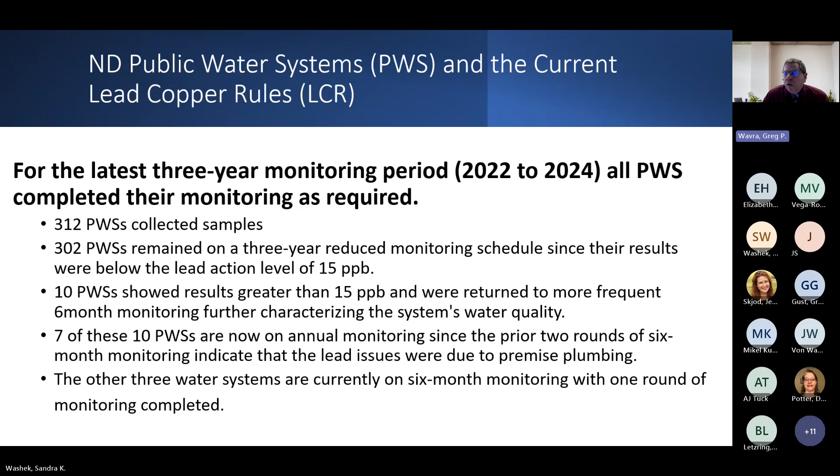So what are the new lead and copper rule objectives? The first one is to reduce the risk of exposure to lead through drinking water. There are 3 ways of doing this.

First is to locate lead service lines through a materials survey. This is a requirement of the water systems themselves. All but 2 water systems completed this and turned it in to us as of October. The thought behind this is to come up with the types of materials going into homes, so we know if it's lead, galvanized, or what type of pipe is coming into a home.

Another part of it is replacing all lead service lines that we find in these materials surveys within 10 years after the survey is completed. That's done through some federal funding and grants that are out there to get these lead lines out of the distribution system and make that water safer to consume.

And the other part is these rules will lower the lead action level from 15 parts per billion down to 10. So sampling, the quarterly, 6-month, and yearly monitoring will be triggered at that 10 parts per billion instead of the current 15 parts.

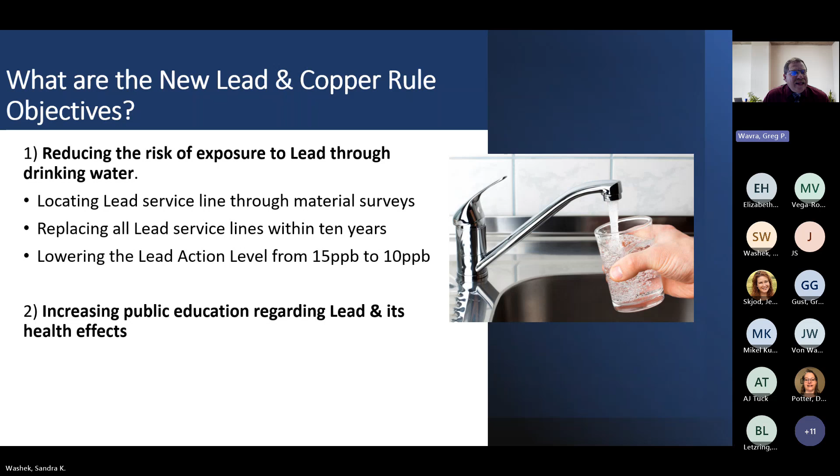So the CCR is, as I stated earlier, an annual water quality report written by the system to inform customers of the current status of their water system. The Lead and Copper Rule revision requires that specific information regarding lead be included in the 2024 and all future CCRs being sent out to consumers.

Information required will include the health effects of lead, and a lead educational statement indicating ways customers may reduce lead exposure from drinking water, such as flushing taps with cold water for cooking and drinking, and other ways of reducing lead like filters.

Also, there will be a range of sample results from the most current round of sampling. In the past it just had a percentage of the monitoring, but now you will see a range from the highest to the lowest samples throughout the distribution system as they sample every year.

And then the lead inventory information, such as why this is being done, where the report is located so consumers may view it, future actions that may be required to update the inventory, and any information regarding potential funding for systems and homeowners for replacement of lead lines.

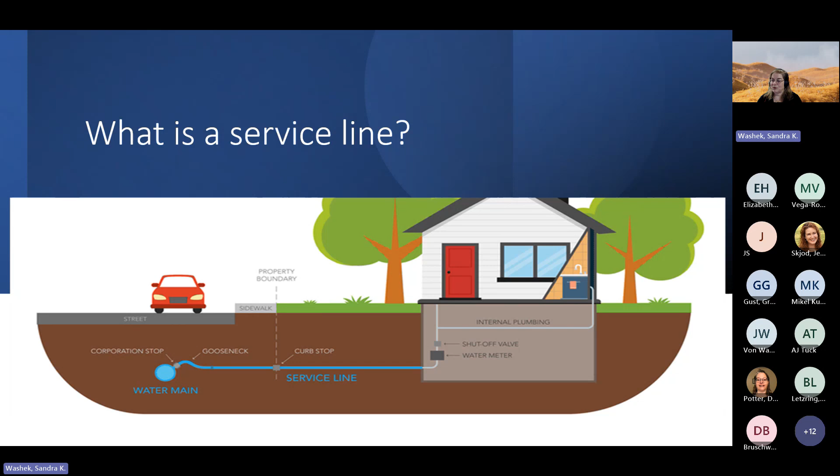From that curb stop to your house is usually owned by the private individual. But again, every public water system has its own ownership rules on service lines. Sometimes the homeowner owns the whole line, sometimes the public water system owns the whole line, sometimes it's split. Talk to your public water system about it.

The other thing I'll define is a term used in premise plumbing. Premise plumbing is where you own the plumbing inside your house. It's not the ownership of the public water system where the service line comes in - it is your plumbing inside your house.

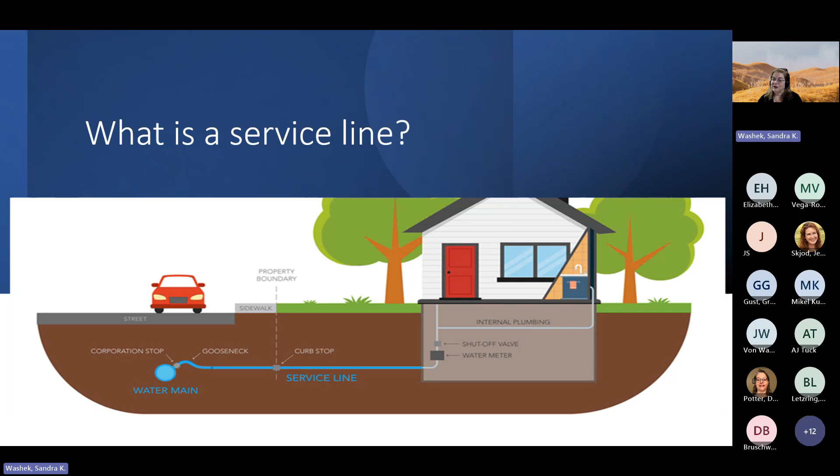So just remember that. One other thing about service lines and why we're identifying this - we're looking for these lead lines coming in. Most lead service lines will not be greater than 2-inch diameter coming into the home. So your water main will not be a lead line - it might be cast iron, but it's not lead. That's due to the size and weight constraints when these lead lines were laid. So just remember, a service line connects the water main to your building.

So under the lead and copper rule, there were some mandates sent out under this regulation. One of the mandates is that all public water systems nationwide were required to conduct an initial lead service line inventory of all service lines within their system and send that information to DEQ by October 16th, 2024.

Part of this mandate required systems to identify and classify service lines as either: lead; galvanized requiring replacement, what we call GRR; where a galvanized line was either hooked up to a lead line or previously hooked up to a lead line; non-lead, like copper or polyplastic; or unknown. Usually that definition of unknown means they don't have documentation identifying what that line is.

These service lines have to be identified by material type, no matter the ownership of the service line, whether it's split or owned all the way through. All service lines had to be on the inventory, whether currently in use, turned on by a water system, or going to an empty lot, or part of a pasture tap, since some rural water systems run service lines out to a pasture tap or irrigation, or if it's a fire line - in some big commercial systems they have separate water lines set in for fire lines. They all have to be on this inventory.

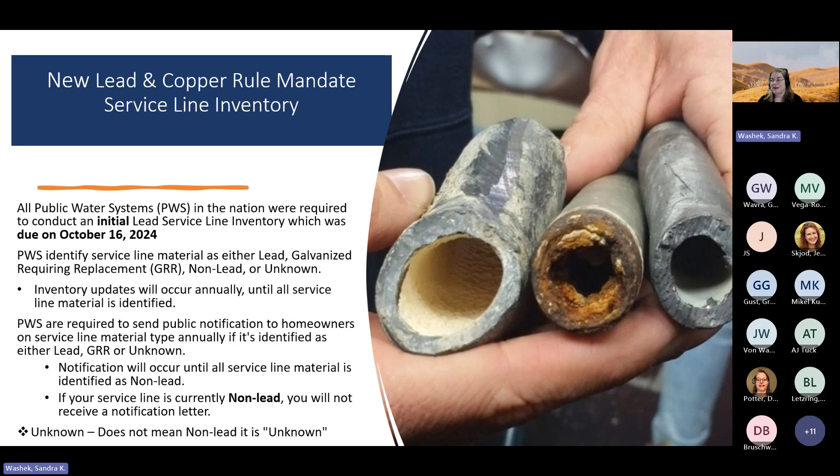If it was identified as non-lead, you did not receive a letter because that letter was not needed to be sent. These letters will continue to be sent out annually to property owners until all materials are identified as non-lead. One thing I want to stress is if you received an unknown letter, it does not mean it's non-lead. We just don't have written documentation or visual inspection telling us what that material of that service line is made up of.

So going back to our 2024 results, our service line numbers in the state of North Dakota, what came in. We had some systems that were combined, so we had only 310 systems needed to do lead service line inventories. 308 sent them in.

As of December 31st, 2024, we had 274,818 service lines inventoried. Of that, we know 5,112 of them were lead, 429 were galvanized, 146,001 non-lead, but our big number is running a norm with the nation. We had 123,276 identified as unknown. We either had both sides or one or the other side of that service line ownership not being able to identify as some type of material.

So what's going on in the future, our next steps by the public water systems is start downsizing these numbers of unknown service lines on their public water system inventory statewide. That is our big push these next couple of years.

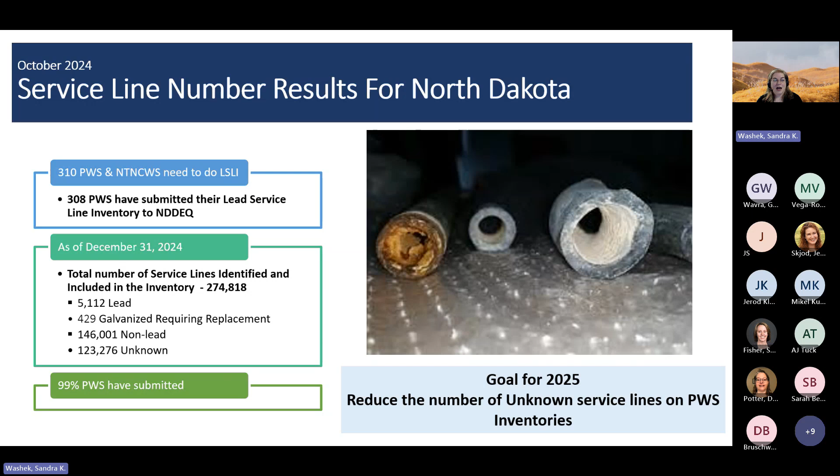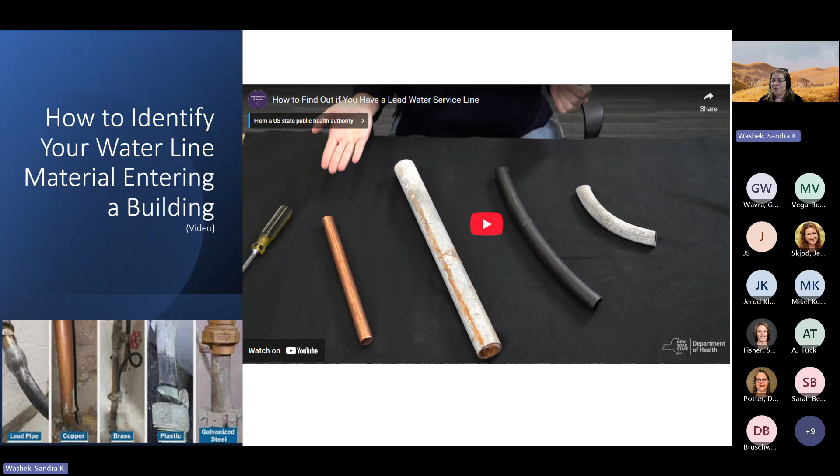And how are we going to do that? So the first thing most homeowners need to know is how do you identify your service line material? What do you do, and how could you go down and look at your service line and know what you're looking at? Well, the state of New York was really nice to present us with a little mini video that we'll play here, and it shows how homeowners can identify their service line material type. So I will start that here.

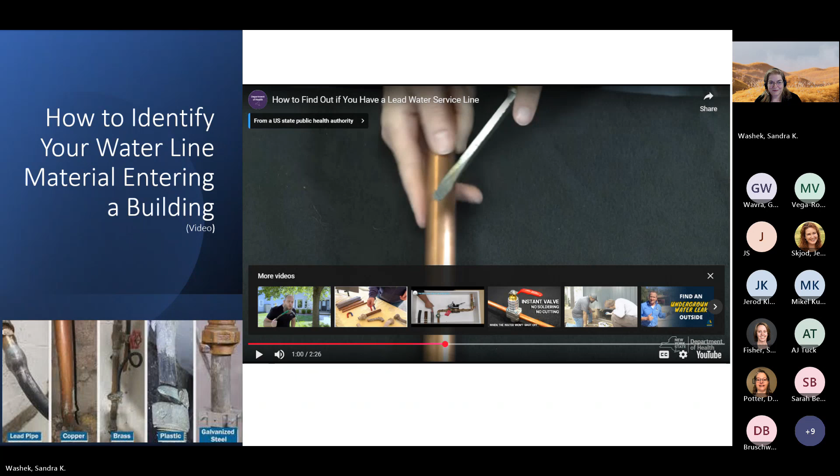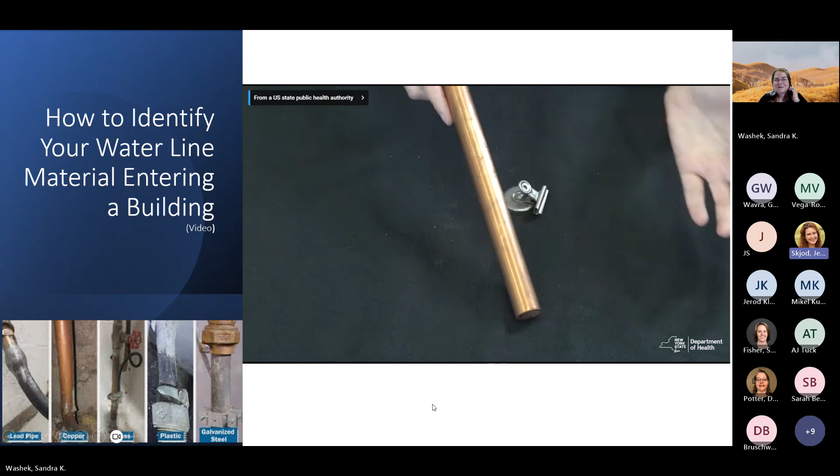Do you know if there's sound on this video, Annie or Sandy, or is it? Pardon me. I guess we're having a sound problem here and everything.

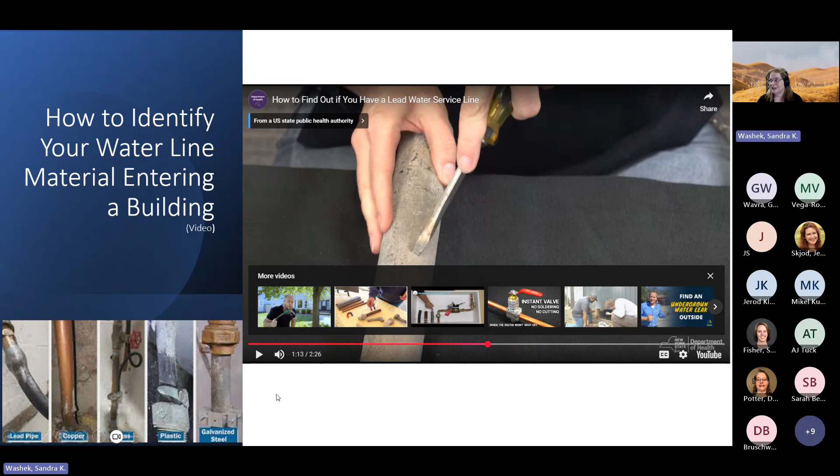I'll just put a link to the video in the chat. We'll put the link to the video in the chat. Pretty much what it does is shows you the step-by-step process of going through and looking at how to do it. We also have a slide on our website going forward with the exact same information to help you identify it.

Taking a screwdriver, a flat edge, or a key, if you don't have that, you go down and find your water meter. You look at the pipe where it comes out of the floor or the wall, and you look at the metal and scratch it very lightly. Don't gouge it, just scratch it lightly. And if the scratch comes out looking like copper, like a brand new penny, and you have a magnet and the magnet does not stick to copper because magnets won't adhere to copper, you've got a copper line.

If you've got a silvery gray line and you scratch it and it's really shiny, but your magnet will not stick, you've got a lead line. Magnets do not stick to lead. If you have a silver line and you scratch it and it has a dull silver look, but the magnet will stick, you have a galvanized line. Magnets will stick to galvanized, but will not stick to a lead line.

Then, looking at that information, we always tell people if you have a nice cell phone, take a picture of it, because then you can record what kind of material you have on your system. Again, this is a way homeowners can do self-testing. A lot of public water systems this last year sent out information asking people to survey and do this, send a picture, do the scratch test, and send it in on their surveys to the public water systems. They also had their own handouts you could follow for how to send it in. Again, this first round of survey happened before October 16th, 2024, and is just part of this initial round of inventory.

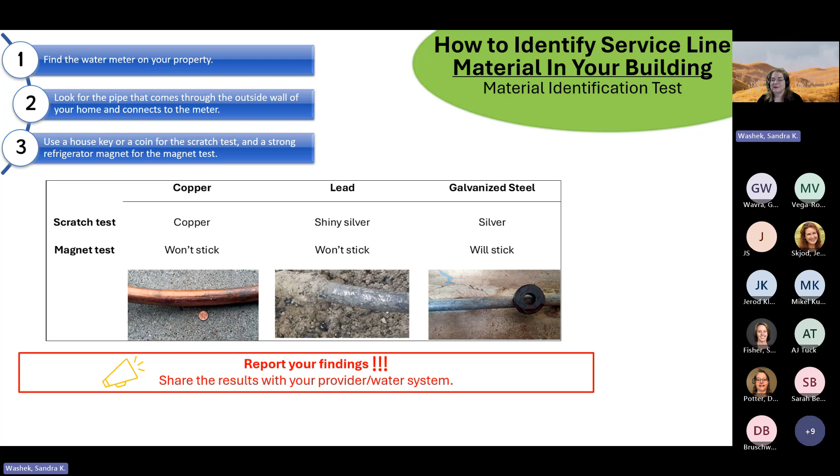With that, the public water systems sent out notification letters to homeowners defining and characterizing their service line. This material type was again lead, GRR, or unknown.

If it was all non-lead, you did not receive a letter. Part of this notification also provided information the public water systems wanted you to know as a homeowner, including steps to take if it was a lead or GRR line, such as flushing your water system after being away, cleaning your aerators, replacement and funding opportunities the system was going to offer, how to report or update your service line material, and how to contact your public water system with questions on the inventory or notification.

Again, the question was asked, why did I not receive a letter on my service line material? It was classified as non-lead, so they did not send a letter. The other question was, how long will I receive this notification? You will receive it annually until both sides of the service line are identified as non-lead, or a line identified as lead or GRR has been replaced with a non-lead line.

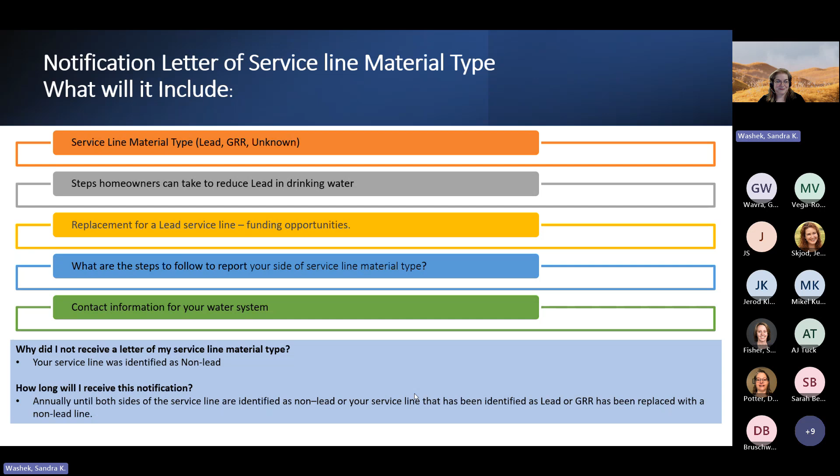The other big question we received was about what's going on when I received an unknown letter. What does unknown mean? It means that either the public or private side did not have written documentation that the city could find, or they could not do a visual inspection of the service line, either on the city-owned side or the private, homeowner's side. That is why it was defined as unknown.

So let's do a quick scenario on this. If there's a yes on the chart, they knew what the material type was, identified by a written document or visual inspection. If the chart says no, that means unknown, they don't have anything. So if the public side knew it was, say, copper, but the private side was unknown, the property owner received the letter.

Swap the other two: the public side didn't have documentation on what was there, but the private side, the homeowner, sent the survey in telling them what they had. Why did I receive an unknown letter then? Because the public side still didn't have that identification. If both sides were identified as non-lead, you did not receive a letter. If both sides were identified as unknown, property owners received the letter. Again, this was required under the Lead and Copper Rule, to receive notification of how that service line was classified.

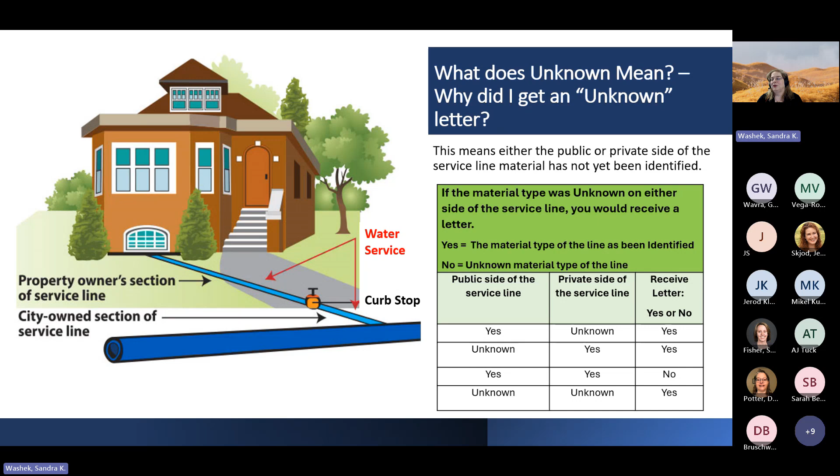Moving forward, what are we looking at in the future so we don't have to send all these unknowns and can identify these service lines? Over the next couple of years, public water systems, rural water systems, and other systems, along with some contractors the public water systems are working with, are going to start sending out additional surveys. They're going to do media campaigns, announcing their plans through social media and Facebook, sending letters, sending people out door to door, asking homeowners to fill out surveys or let them in to take a look.

At that time, it's the homeowner's choice to decide how they're going to help the public water system identify that private or unknown side of the service line. The homeowner can choose to fill out the survey that was mailed to them and take a picture and send it in. That way they know what's going on, send it in, and they don't have to have somebody knocking on their door and letting somebody into their house.

If the public water system sends somebody out and they're knocking on the door, it's up to you as a homeowner to decide if you're going to let them in or not. If you're concerned, call the public water system and ask if this person is supposed to be here, who they're working with, and whether they're legit.

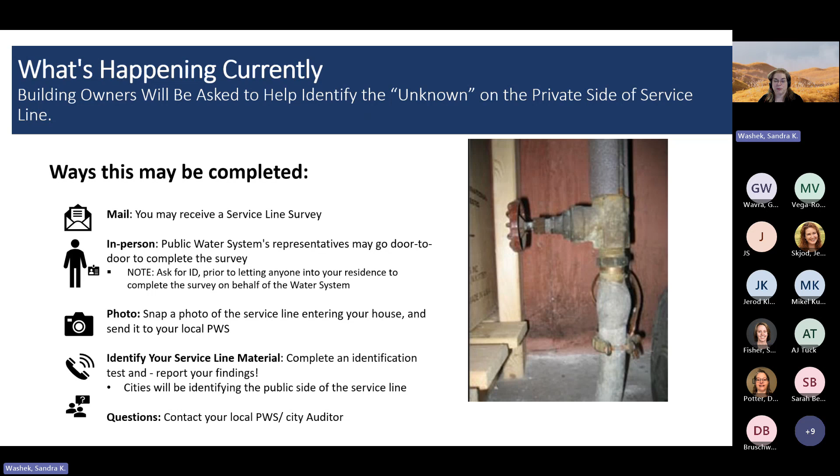The engineering firms and the public water systems they work with will be in touch with people, letting you know when it's happening in your system.

If you want additional information on lead and copper and what's happening for lead in drinking water, EPA has a number of great sites to look at. You can go to the US EPA Consumer Lead website. It gives great information on how to reduce lead in drinking water if you have it, how to replace lead service lines generally, and other sources of lead.

We also have information on the North Dakota Department of Environmental Quality website, covering not only drinking water but also lead-based paint and other lead sources. Both are good sources. Again, if you have questions on what's happening in your area, contact your public water system first, because they will have what's specific to your location.

We work with the whole state of North Dakota, 310 public water systems. A lot of these are rural water systems with multiple little towns in them. Everybody will be doing something different at a different time, so watch social media and look at your water bill. They will be sending information out as they go around.

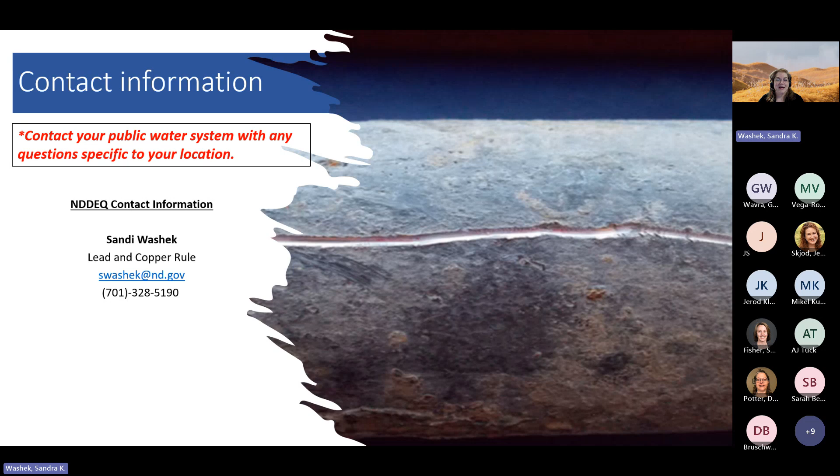If you want to contact me, you can. I'm Sandi, and this is my email and phone number. But generally, start local and work your way up to me. With that, that's the end of my talk. If you guys have any questions, we'd be more than happy to take them now.